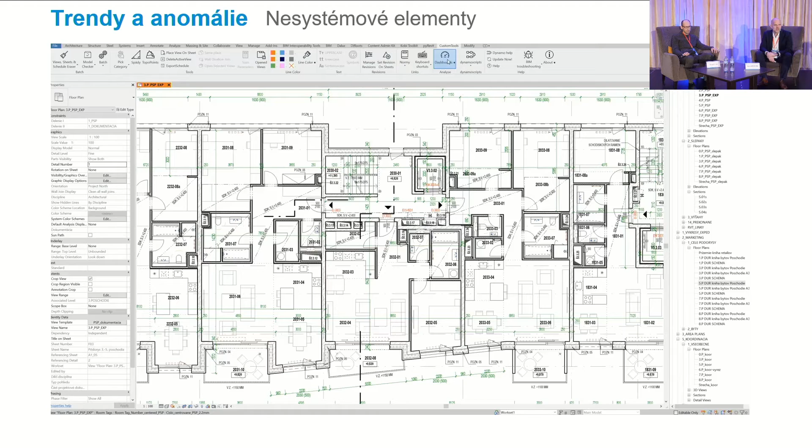So let's enlarge this dashboard. This dashboard that you can see here, it is actually the sum or the full list of our files, and we can look at them individually or all together.

We measure various parameters. We have some formulas that are set in such a way that there are limits to parameters, and whenever the limit is exceeded, then we can see it in the dashboard, so the user can immediately see that there's something wrong - for example, a number of lines, a number of DWGs, etc.

For example, we know that someone erased a number of views, and we see, for example, how long it takes for the model to be filled with warnings.

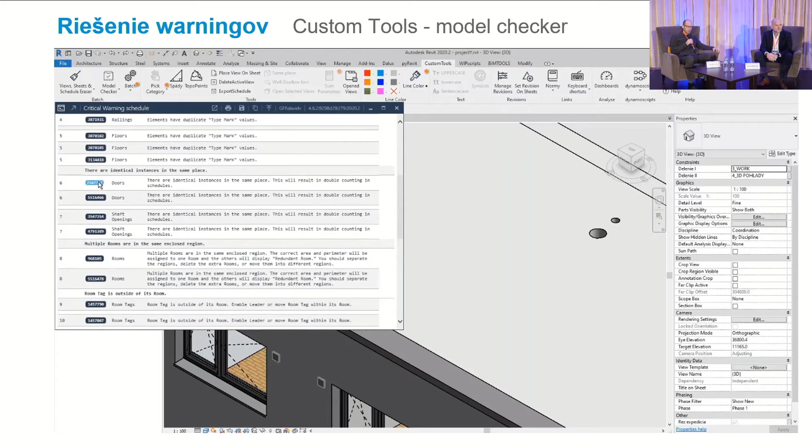Of course, we want to somehow modify or edit it. We have Custom Tools. We can modify it. We click on the specific error, and then in Revit we zoom immediately on that specific part. We can isolate it, and we know that there is a problem with that, and we can fix it.

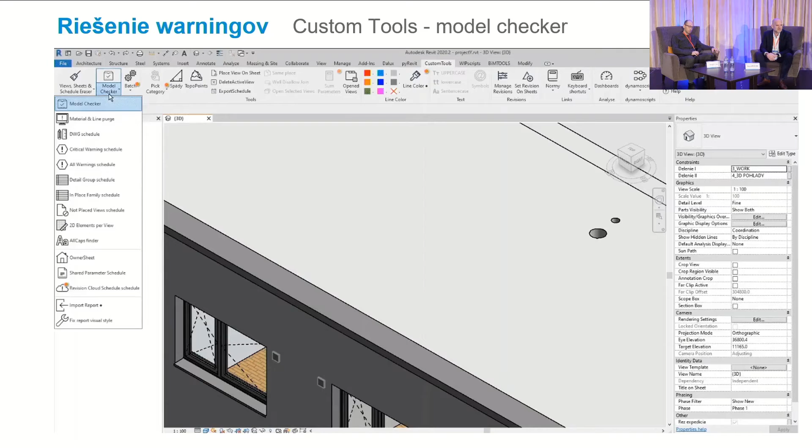If some of you work in Revit, you know how cumbersome it is to work with warnings. I'm very happy for this tool from David, because at least it allows me to have the warnings or this window with the warnings on the side.

Okay, the time is running up, so we have to speed it up. So there are these tools and some other tools.

We also have the statistics of use for each tool. We see how often these tools are used and whether people use them and to what extent. And if they are not used, we know that there is a problem with it. Probably people don't know about the tool, or it's not that convenient, and therefore it needs to be fixed.

So now, in Revit there is a number of ways how we can influence people. One is educating them, then the second is to add this plugin. For example, that there are some new trainings and they should watch it.

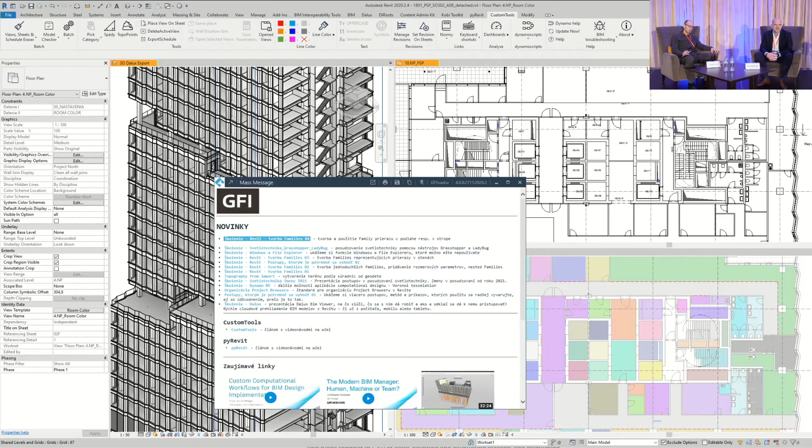And what is also important is we try to avoid bad things happening. So when they are trying to do something that they're not supposed to, we immediately have this pop-up window that guides them how to do it properly. And then at the same time, we can tell who did what in what project.

So there are these 3 or 4 levels. The first level is the prevention, so that's the instant log, and it can be displayed. Then there is the data extraction.

So every night there is this Revit batch processor that extracts data, and then the next is a Power BI. Once we know what the data is saying, then we can edit files and eliminate any errors, or through Custom Tools. And therefore we need to make sure that everyone has the updated version.

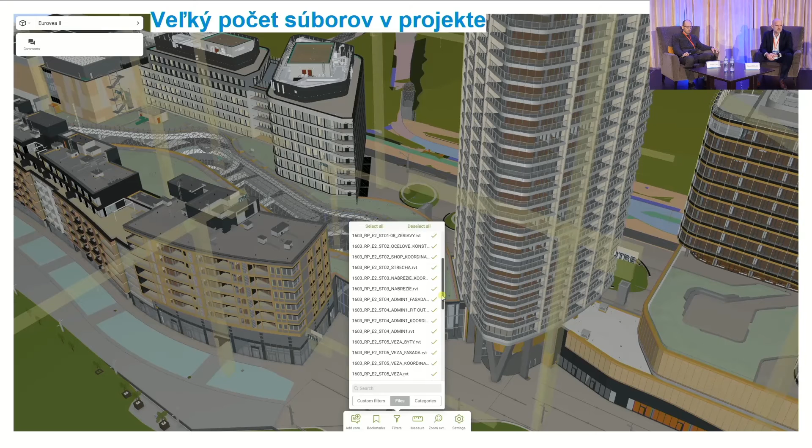Okay. Now, the second part is about how to inspect our internal project data. So, if we have way too many projects or files in Revit, it would be cumbersome to check manually. So we need to, for example,

check if the data in individual Revit files are the same. That is why we have these oversight dashboards, and then the data are synchronized, and it is interactive. That means you can click on the data.

For example, we can check various rooms. In rooms, we can check if the same flooring is used. Then we can distinguish between various types of rooms. So this is a great tool for someone calculating the costs, so that they

see, for example, this type of tiling is used in all these kinds of rooms. Here we see, for example, that in 20 different rooms, this is the composition. And we also make sure that there are no errors, and if there are problems, we can open it. So we are actually tracing it from the consequences backward, and that would not be possible without the data standard.

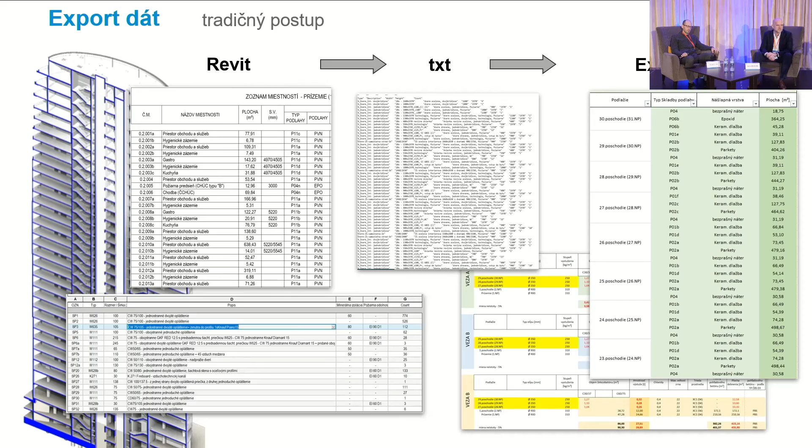Okay, and the last thing is that we want to be able to share this data with our partners. Normally from Revit we exported it to text and to Excel, and then the formatting is lost. We don't want to do it in Excel. That is why we use other tools.

We don't want to use Excel. We want to share the data with the client. For example, this particular thing is related to parking spaces, and this is what they get, and they don't get just a single spreadsheet. They can click and filter whatever they need. So okay, it's not about spreadsheets.

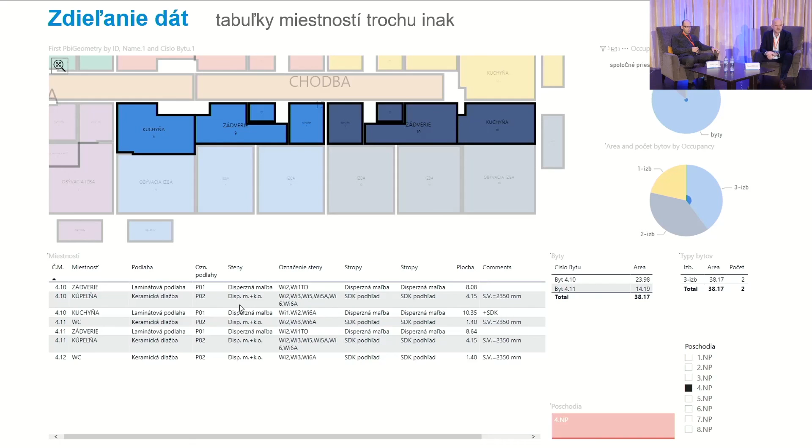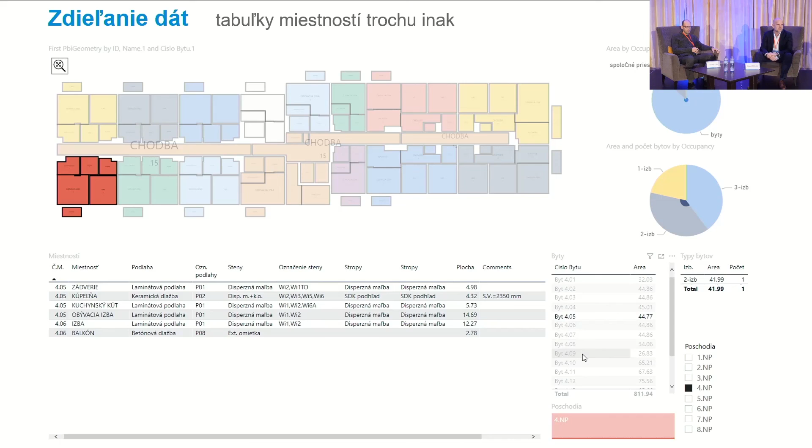What we are trying to do is to get rid of a problem that the clients get data that are not interactive. If they get just a spreadsheet, it's very difficult to get their head around it. But if you have a layout, you can then click on whatever you need and produce a spreadsheet that you want. So this interactivity is the key.

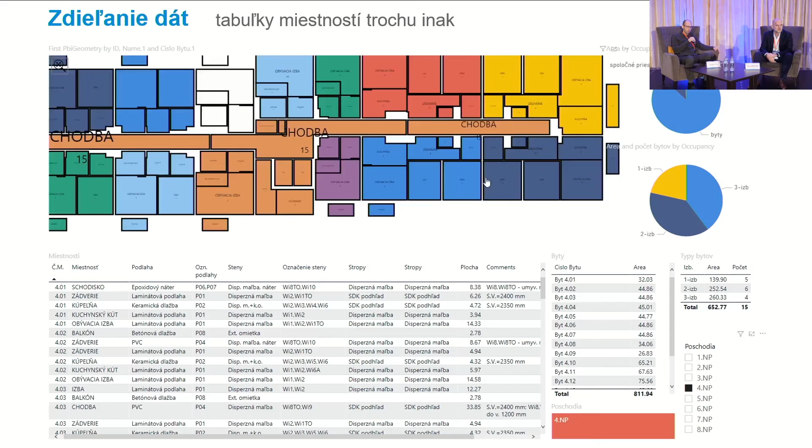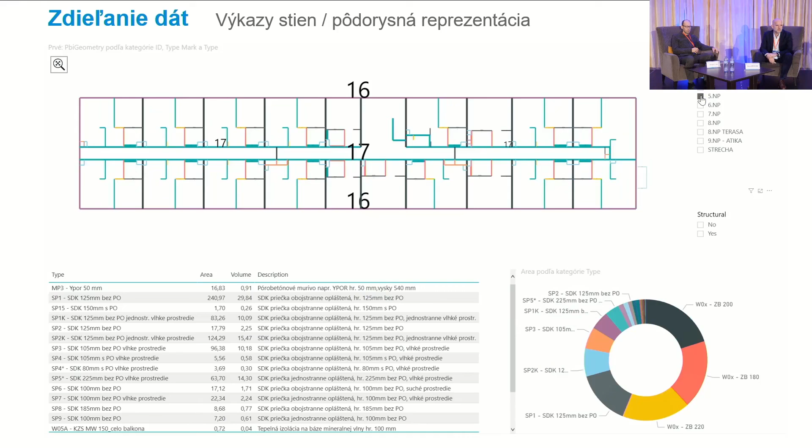I can click on any of the rooms, any of the apartments, so I don't have to send them 50 different Excel spreadsheets for each apartment. They get a single file where everything is that, and it's not only about flooring. It's about walls, everything. I can click on any of the rooms and I see the spreadsheet.

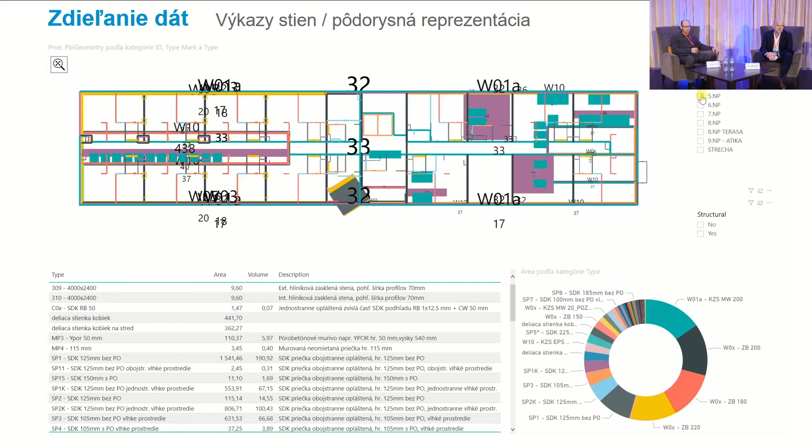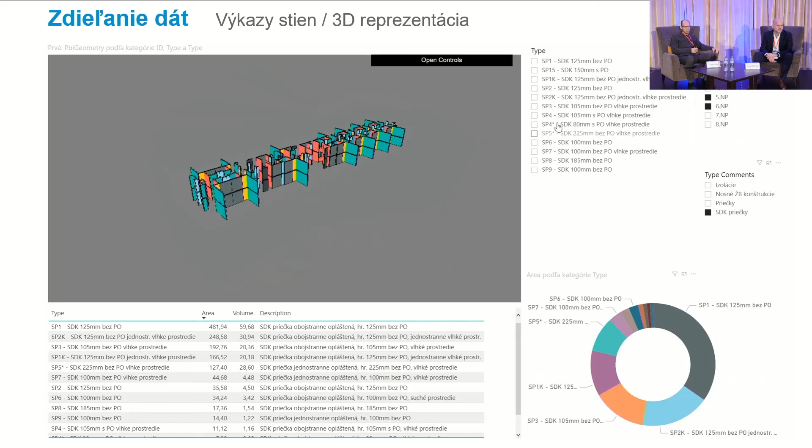And it's not only about 2D. It can be 3D. There is a 3D interactive display through Power BI, and they can click on that and select whatever they want. They see immediately the figures. So the understanding of the model is so much easier.

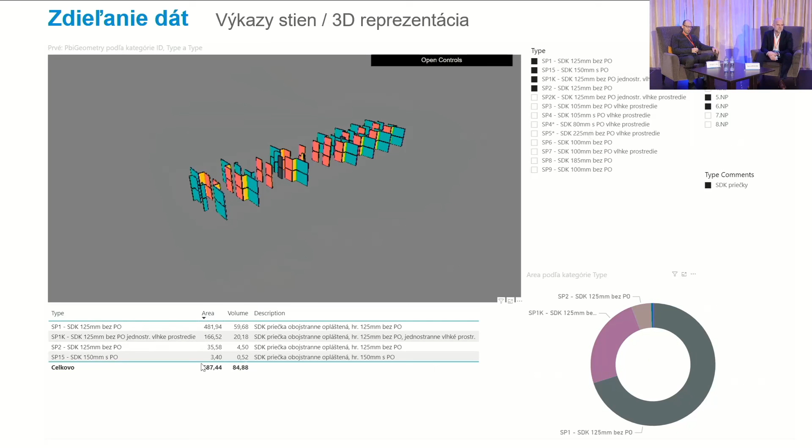And what's important is that they don't have to have any software, they don't have to buy any tool or anything. They can use just a regular web browser.